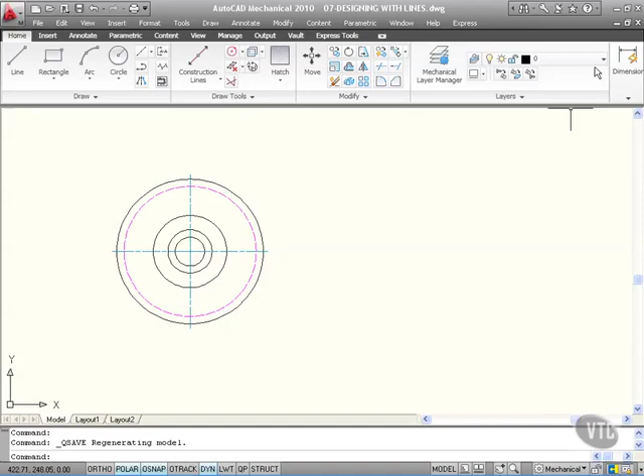Let's have a quick look now at designing with lines. We've got the front view of our spigot gear wheel there. We can see some hidden detail also. What I'm going to do is thaw out my construction line layer, AMCL there. And you'll see there's plenty of construction lines that we have to deal with there.

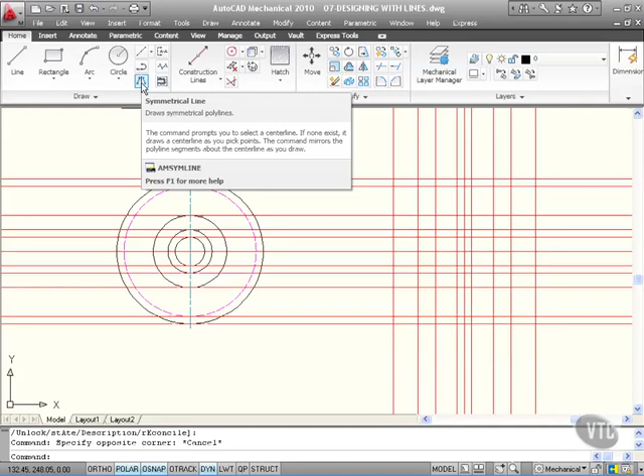Now what we're looking at is there's a center line just there on those lines. So what we need to do is work with that and basically generate a profile. Now what we're going to do is work with this. It draws symmetrical polylines as you go. So the command prompts you to select a center line. If none exist, it will draw a center line as you pick points. The command mirrors the polyline segments about the center line as you draw. So let's go with that.

As I come out, select existing center line or first point. So the center line is going to be there. So I need to switch on my intersection snap. So I go down to O snap here. Make sure that intersection is on. That's the one I'm going to need. And look at all these intersections now. So I'm going to start right there.

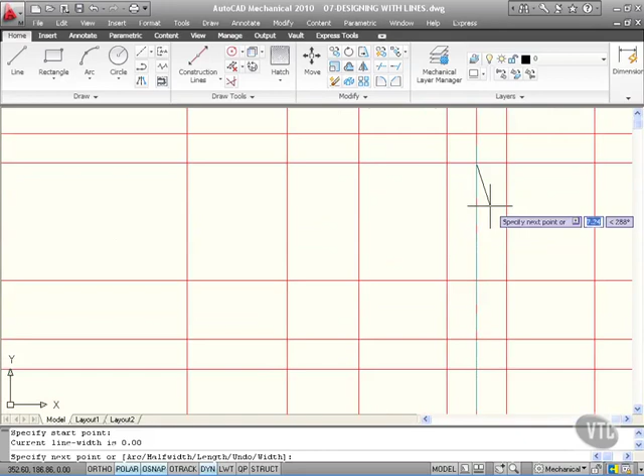Select existing center line. Center line endpoint is going to be there. So there's my center line, as you can see. Now my start point is going to be there. And as I come out now, I'm just going to keep clicking away. And I need to zoom in now. It's kind of hard to see, but I've started in the wrong place there. So I just need to hit escape there. Can you see that I've started in the wrong place? I didn't use the snap. It's very important that you get that snap just right. So let's try that one again.

Symmetrical line here, and it wants the first point of the center line. So as I come in here, select existing center line or first point. That point there. I come down to that point there for my center line endpoint. Okay, specify a start point. Let's zoom in now. Make sure you get the snap. So you come in there like that, and I'm clicking away now, drawing my shape as I go.

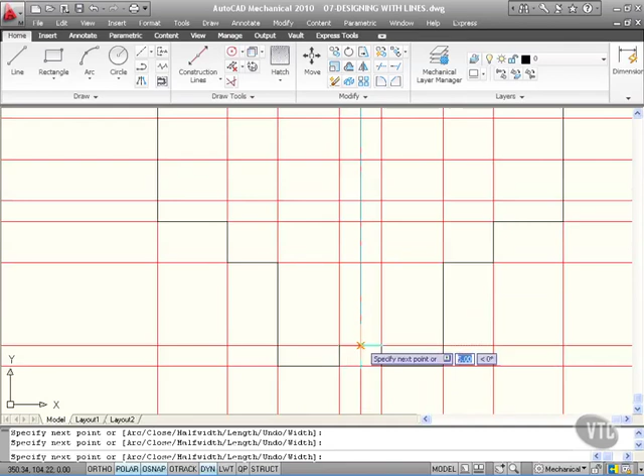So I'm coming down here, coming out there, coming down again, like this. I'm working my way through. Can you see? So I'm lining in with things. And can you see the symmetrical line appearing on the other side? As I go across now, so I'm going down to there, coming round, coming in. Remember, it's object snap driven. So you have to get your snaps just right. So as I come in now, I come along here, zoom in a bit. So it's into there, and up to there, like that. I then press enter to finish.

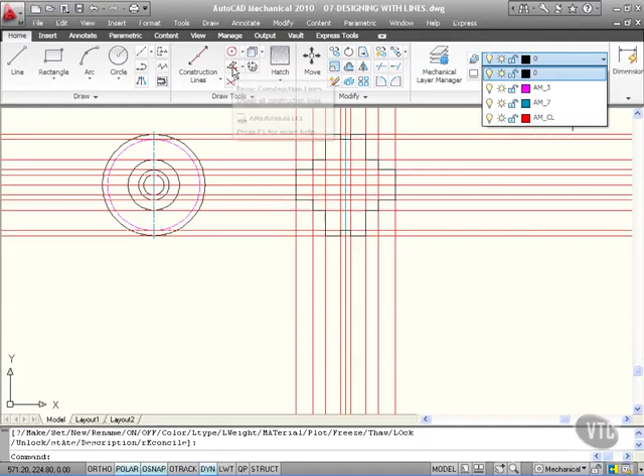If I zoom out now, you can just see, look, there's one polyline there, there's one polyline there. The construction lines are getting in the way. Now you've got a choice there. You can either freeze them like that, and then you can see exactly what you've drawn, or the other trick is to actually get rid of them here. Erase all construction lines. If I hit that button, they will all go. So if I click there, they're gone. Never to be seen again. I'll just undo that and bring them back. My personal preference is to actually freeze them like that. The reason being, you may need to use them again.

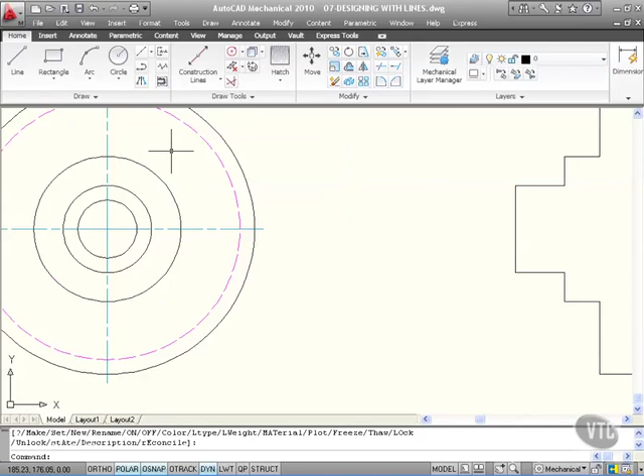Okay, breakout lines now. We'll do that very, very quickly. We'll zoom in on this quadrant here of our front view because we need to show this hidden detail in full. So there's our breakout line. So we're going to specify a starting point. I'm going to shift and right click and go for nearest and just pick a point there and just do a few breakout. It doesn't matter where you go with this. Like so, just come out to about there, shift and right click again, find nearest again, and pick a point on there like that. Then it's a right click, and that curves that nice and neatly for your breakout.

Now what you need to do is break this one here. So we need to break that at that point there. So I go to my draw tools here, and I need break. Now break isn't actually there, it's here on modify. There's break right there. So pin it open, like so. And you want break at point. You select this line here, more to the point, the circle, and you pick that intersection there. It's now broken. Or is it? You can't break. An arc cannot be a full 360 degrees. So what I need to do there is change that.

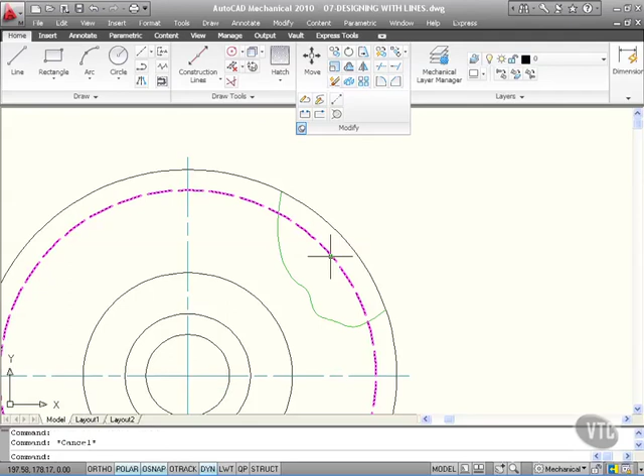Ideally, what I would do there is I'd actually trim that out, because I don't actually need that hidden detail line just there. What I can do is draw an arc instead. So I'll trim it away, using this here as my cutting edge, and trim that back like so. Then press enter to finish. So what I need to do now is put an arc in there. I know where the center of the arc is. I know where the start point and the end point of the arc is. So I go to AM0 here. Is AM0 there? Not yet. So let's get that layer up and running. So we've got AM0 running.

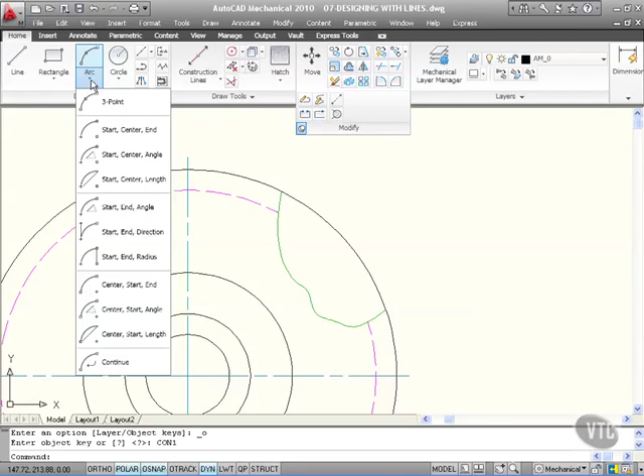I then need an arc, and I need start, center, end. There we are. Arc, start, center, end. So the start point of the arc will be there, the center will be there, and the end will be there, like that. Now you'll notice that's come out slightly off because I haven't actually picked the ends of that arc there. I've picked points on the breakout line. So quickly undo that when you realise your error. Same process again, nice and easy.

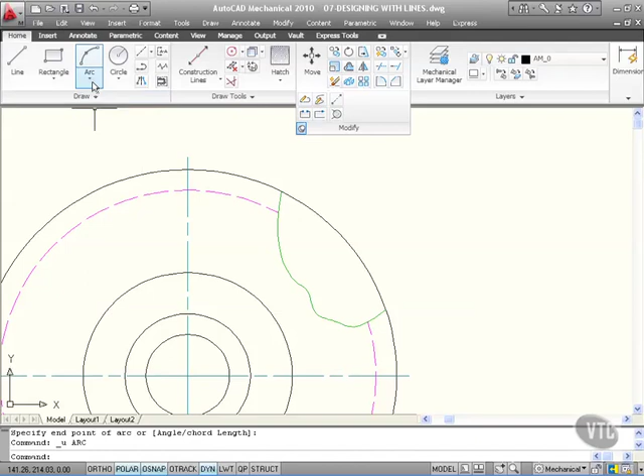So it's arc, start, center, end. Make sure you touch on this point here. You might need to zoom in. That's what zoom's all for. Okay, center point is right there. Come back here, make sure you get the end of the arc. Touch it there. Then it ties in nicely. Can you see that? So you've got a perfect arc showing the cut through.

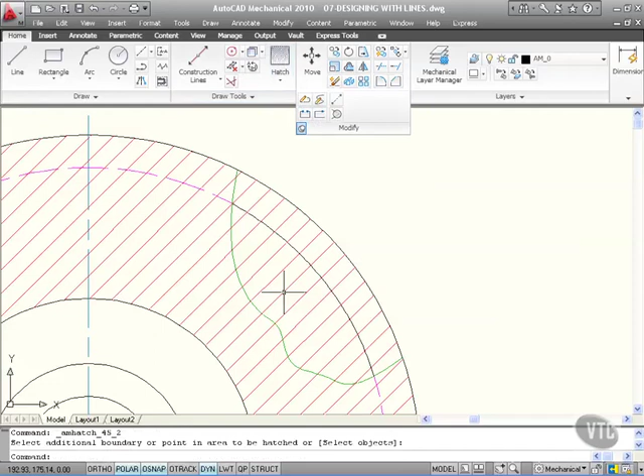All we need to do is hatch that now. So we go to hatch here, and we'll go for the 2.5mm again. Pick a point. That's hatched all the way in there. We don't want that, so let's do a Control-Z. That's because that's not a fixed boundary. So we might need to sort that out later, perhaps.